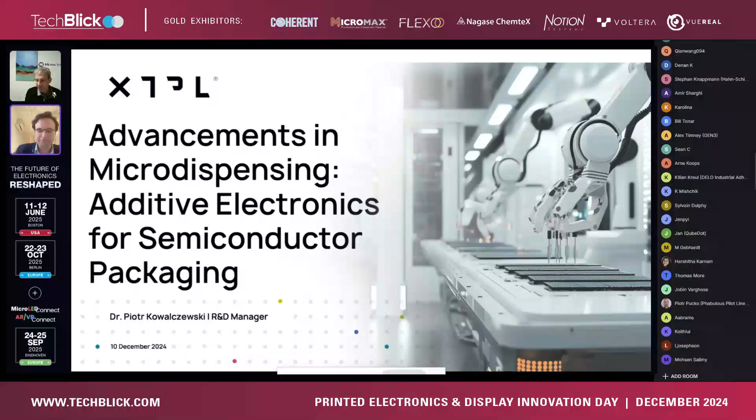I'm coming from a company called XTPL. We are a Polish company, but we are operating worldwide, so we have a number of distributors. We have quite an interdisciplinary team of around 90 people, a lot of them with PhD degrees in physics, electronics, material science, chemistry. So this research component is quite important for us. And we also take IP seriously, so we now have 40 granted patents on the technology I will show you in a moment.

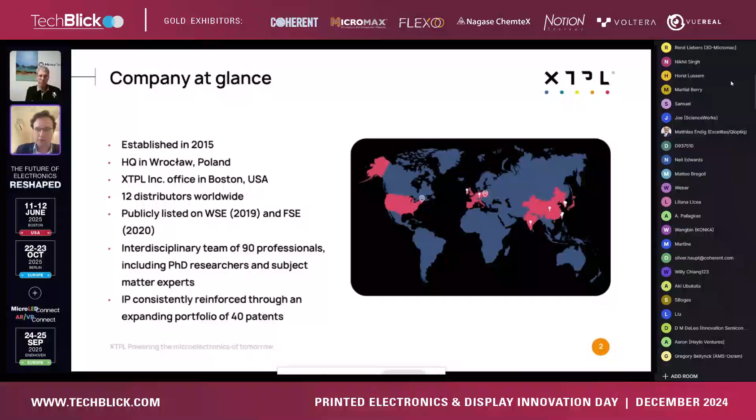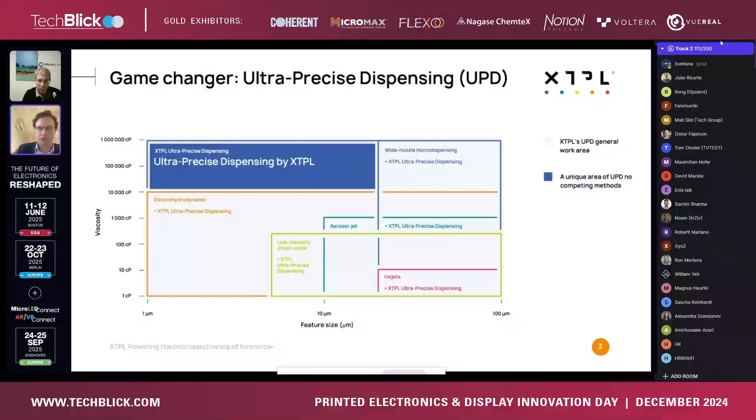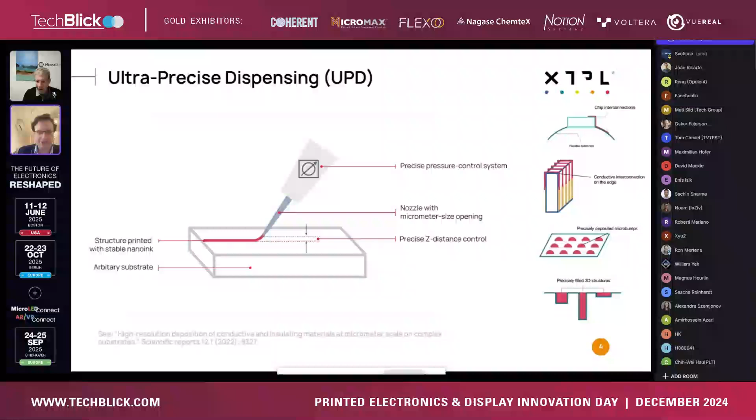When thinking about integration, you can think about a couple of different approaches. You can think about chip interconnections, printing interconnections on the edges, deposition of micro bumps, or filling micro vias. These are the kinds of approaches you can use with our technology.

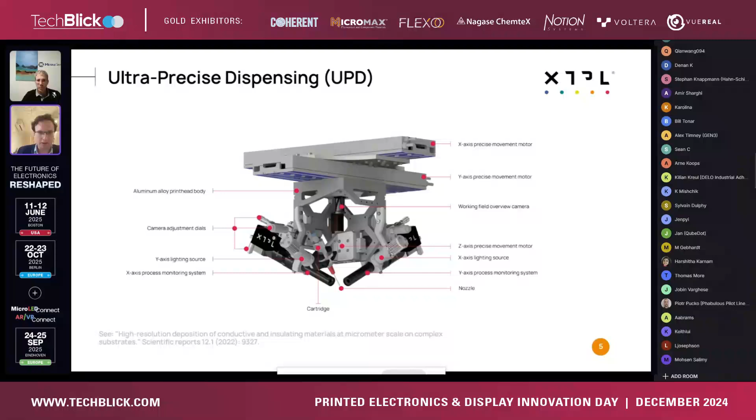This technology is actually implemented in devices. One possibility is the laboratory printer, and the other is the one you can see on this slide - a dispensing system that can be implemented on a production line.

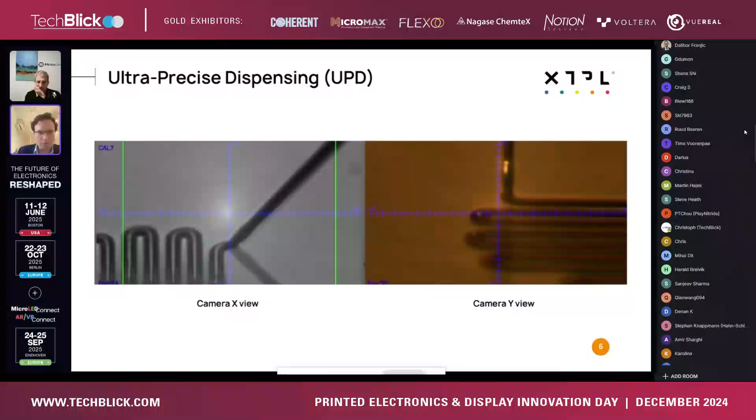I hope you can see the movies, and you can see that we can dispense pretty arbitrary shapes. So whatever is needed for your architecture, you can load it to the system and print it. There are no problems making turn routes or printing whatever is needed for a certain architecture.

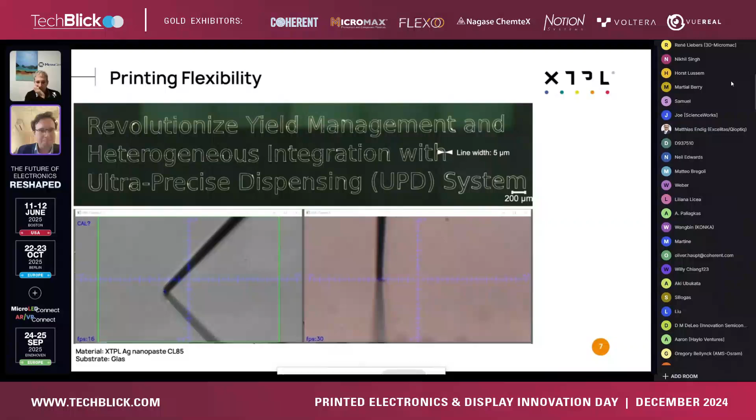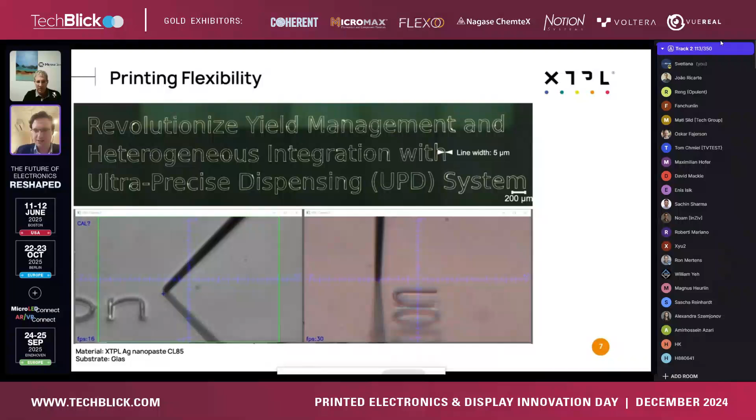To demonstrate this printing flexibility, we just printed this message. We'd like this technology to revolutionize yield management and heterogeneous integration. You can see that indeed there is no problem printing these arbitrary shapes or letters in this case, and the line width for the letters is 5 micrometers here.

When you think about integration, the first thing that comes to mind is the idea of printing on steps. Usually you would like to integrate different components, and printing on a step is necessary in this case. You can see different connections, different examples of printing on steps.

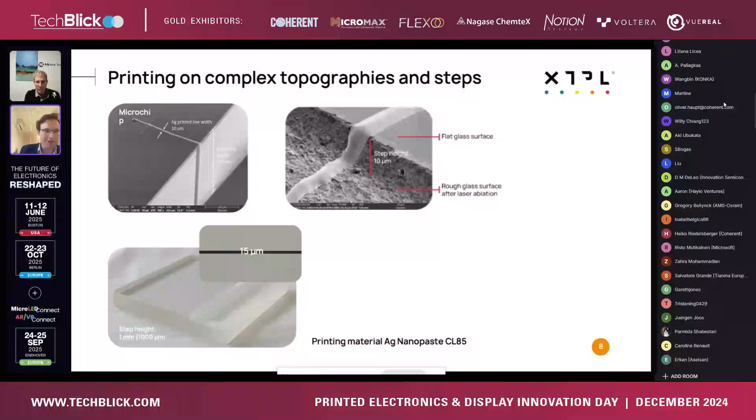You can see a connection on a microchip, and this microchip has a height of 350 micrometers and a line width of 10 micrometers. So you can see that the line width is much smaller than the step height. Similarly, you can see this type of connection printed on a rough surface and also on a step with a height of 1 millimeter.

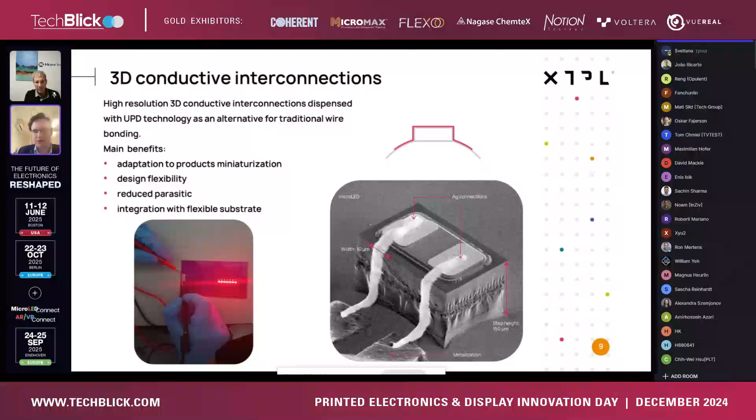Thinking about MicroLEDs, this is quite an obvious choice to make a metallization scheme in MicroLEDs. You can see an example on the right-hand side - a MicroLED chip with a step height of 150 micrometers, and then we make a connection using a 10 micrometer wide line.